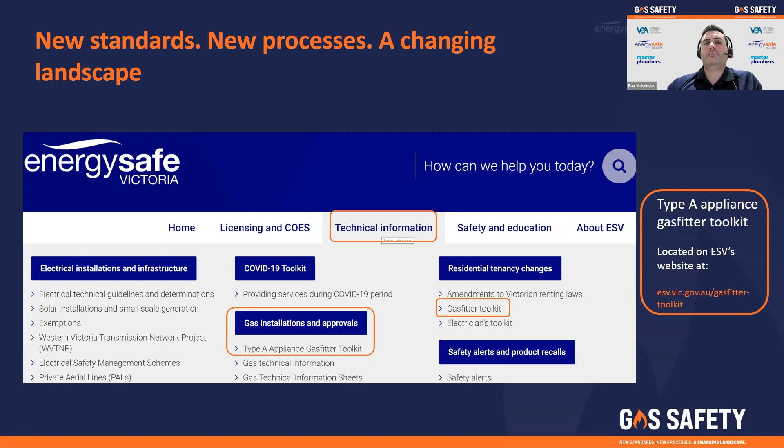Now, when visiting the Gas Fitters Toolkit webpage under the Residential Tenancy Changes, you'll find a frequently asked questions heading, which contains questions ESV and the VBA have received relating to gas safety checklists and gas servicing. This information is constantly revised to incorporate new questions received from industry and can be valuable to you as a servicing gas fitter.

In addition to this, many of you may have already availed yourselves of the gas safety checklist document, which is made available to support gas fitters meet the objectives of the residential tenancy regulations. Gas information sheets specifically relating to gas service work have all been included within to make your browsing experience a little bit easier. Now, we are currently in the process of updating the checklist with the view that you will be able to upload the PDF form onto the VBA portal, which will be discussed further on in this webinar.

I'd also like to take this opportunity to remind gas fitters that not all of the gas safety checks listed within the checklist are safety critical. Now, whilst it is understood that a non-compliant item is identified as part of the gas safety checks, not all of these items listed are deemed reasons to isolate an appliance or cap the appliance off. Now, there's some growing concerns that industry is starting to isolate gas appliances for minor non-compliances that are not immediately unsafe. An example of this is the disconnection of a gas appliance for not having an isolation valve adjacent to the appliance. Now, clearly this is not a safety critical issue, but rather is considered a non-compliance.

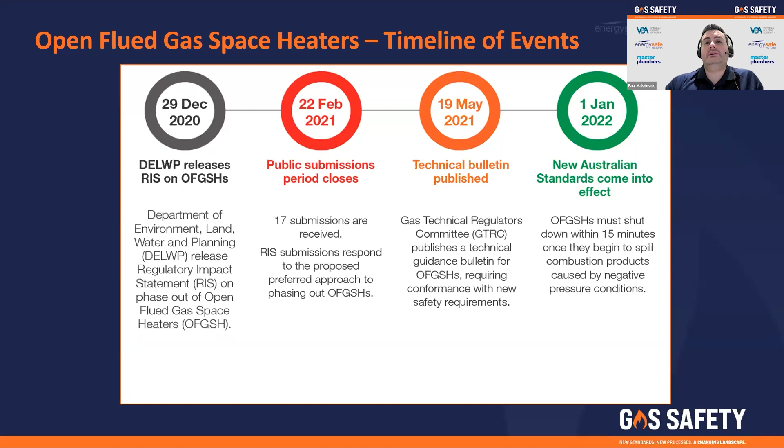ESV is also considering prohibiting the sale of open flue gas space heaters that do not meet the new requirements, as the expectation from industry was that old stock would run out in 2021 and not be sold into the winter of 2022. In addition, the Victorian government is considering prohibiting the installation of open flue gas space heaters that do not meet the new requirements as of the 1st of July this year.

The GTRC Technical Bulletin imposed additional tests to an open flue gas space heater when subjected to a sustained negative room pressure condition. The requirements manufacturers are required to meet are contained within the Technical Guidance Bulletin and can be found on the GTRC website.

There are also amendments to the standard for decorative effect appliances with the introduction of markings for the appliance and its packaging, making it clear that open flue Type 2 decorative effect appliances and Type 1 decorative effect appliances require permanent ventilation.

Recently you may have noticed that ESV have assessed whether to exercise its powers under Section 76 of the Gas Safety Act to prohibit the supply of open flue gas space heaters which do not comply with the current AS/NZS standard, and under Section 69A of the Act, to declare that open flue gas space heaters that do not meet the latest safety requirements specified in the standard are no longer accepted for the purpose of supply and sale in Victoria.

As part of this assessment, we have consulted with industry stakeholders on the proposed regulatory action by means of issuing a consultation notice and draft instruments for public review and response. We are in the process of reviewing the responses received and will keep industry posted of any outcomes moving forward as they are finalised.

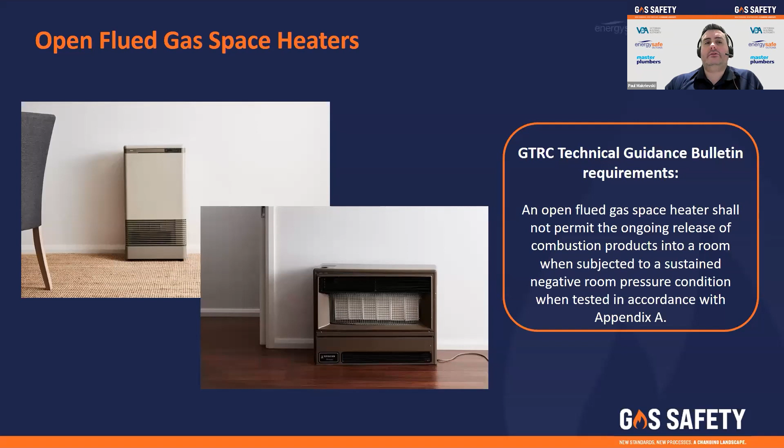Open flue space heaters that currently do meet the standard can be found on the ESV website under the Safety and Education tab, then Gas Safety at Home, Heating Your Home Safely with Gas, and once you're on that page, the tab that is listed as New Safety Standards for Gas Space Heaters.

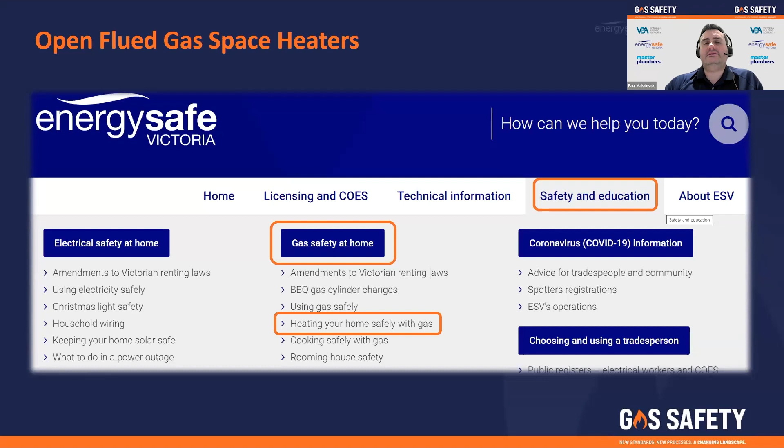A list of the open flue gas space heaters that are currently listed on the ESV website are displayed on this slide, but as we just mentioned, can also be found on our website at any time.

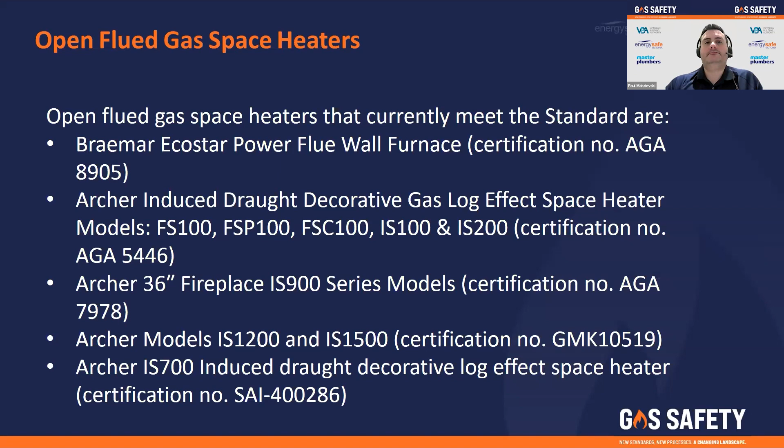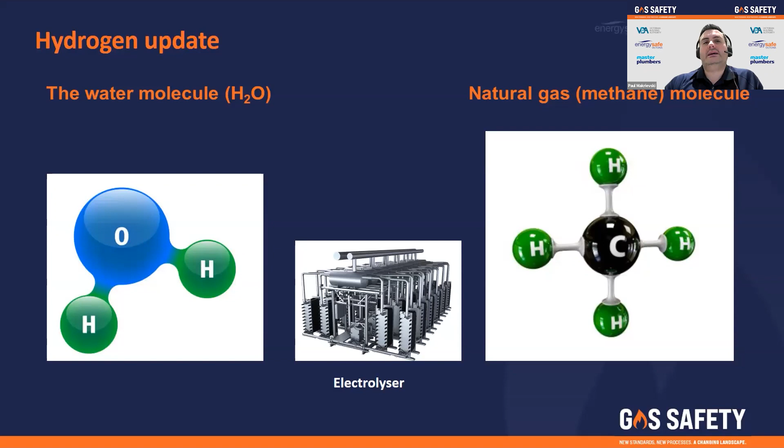Now we'd like to provide an update on hydrogen gas. Bearing in mind we have some significant changes to industry at the moment, so we'll try and keep this as brief as possible. Federal, state and territory governments are committed to net zero carbon emissions by 2050. Hydrogen, as a replacement for natural and LPG gas, is considered part of the solution to achieve net zero emissions, as there are no carbon emissions such as carbon dioxide and carbon monoxide when the gas is burnt.

There are a number of hydrogen-related pilot projects that ESV is involved in. These include the Hydrogen Park Murray Valley proposal, which is to inject 5% and then 10% hydrogen into the Albury-Wodonga network. The HyCel project at Deakin University Warrnambool has a feasibility study to install some boilers operating on 100% hydrogen at the university's campus. In the UK, the first 100% hydrogen demonstration gas home has been built, the HyGrove, which includes a hydrogen cooker, boiler, and space heater.

Emerging technologies such as hydrogen energy storage systems include an electrolyzer to produce hydrogen from water, metal hydride storage to store the hydrogen gas in a solid form, and a fuel cell to convert the stored hydrogen into electrical DC power.

ESV, as a member of the Future Fuels Cooperative Research Centre, is playing an important role in contributing to the research and testing into hydrogen-blended natural gas and 100% hydrogen, and the impact that this will have on transmission and distribution pipelines, consumer piping, appliances, components, and the training and upskilling of gas fitters to transition the workforce in preparation for a hydrogen economy.

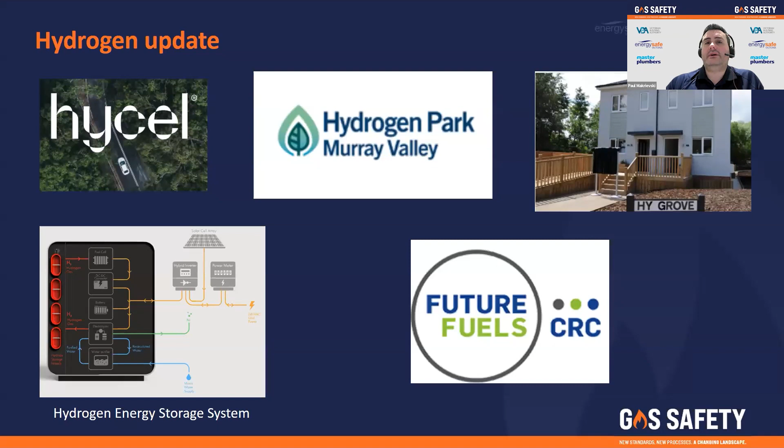The Skills Services Organisation, Artibus Innovation, under the framework of the Australian Industry Skills Council, is facilitating the development of units of competencies for gas fitters training on hydrogen under the Construction and Plumbing Industry Reference Committee working group. This working group has been established to provide both strategic and technical input on the project and unit development.

To date, the working group has identified 6 key skill requirements that address current skills and emerging gaps in this sector. These have been translated into a proposed unit framework underpinned by 2 streams: combustion and fuel cell electrolysis. To ensure current skills needs are met, 11 new hydrogen-based competencies are being put forward aligning with traditional combustion work. To support emerging requirements around fuel cell and electrolysis, 8 new competencies are being proposed to ensure plumbing practitioners are work ready to meet future market needs.

Gas fitters will notice a survey being sent out via email asking for you to share your views on future hydrogen training in a zero carbon economy. The survey should take about 10 minutes to complete and will help design future hydrogen training that meets the needs of plumbers and gas fitters.

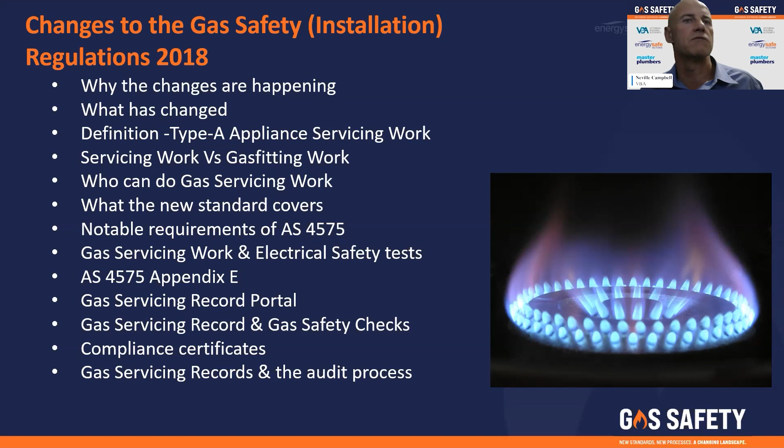The topics we will cover are why the changes are happening, what has changed, the definition of Type A appliance servicing work versus gas fitting work, who can do gas servicing work, what the new standard covers, the notable requirements of AS 4575, gas servicing work and electrical safety tests, AS 4575 Appendix E, the gas servicing record portal, gas servicing records and gas safety checks, compliance certificates, and the audit process.

So why are the changes happening? Since 2010, there have been 3 confirmed fatalities and several incidents of non-fatal carbon monoxide poisoning caused by open flued gas space heaters in Victoria. Until now, there were no mandated Australian standards for the servicing of gas appliances, which meant that the quality of servicing was inconsistent. Following a coronial inquest into the 2017 death of Sonia Sofianopoulos, 8 recommendations were made, including the phase-out of open flued gas space heaters in Victoria.

Further consultation with industry stakeholders reinforced that mandating AS 4575 for gas servicing work would also improve safety outcomes for building occupants.

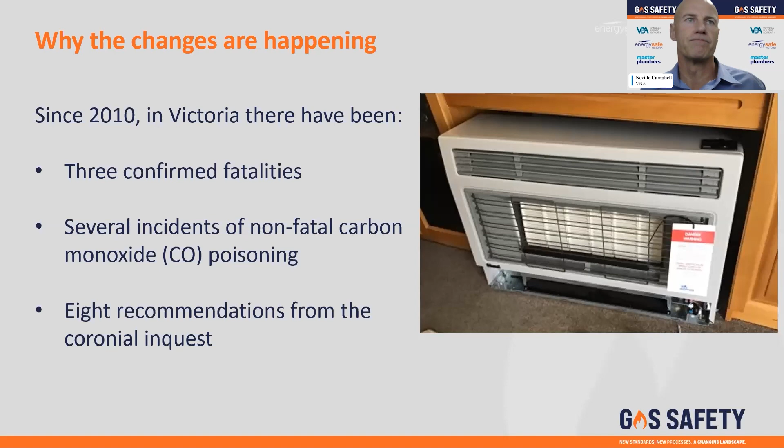So what has changed? To ensure that gas servicing work is carried out to a consistent standard, Australian Standard 4575 has been mandated through changes to the gas safety regulations and is now the minimum standard for carrying out servicing work on a Type A appliance in a standard gas installation.

The changes introduce new terms derived from the plumbing regulations and the Building Act into the gas safety regulations, and define the VBA within the context of the gas safety regulations.

Changes also include a mandatory requirement for gas fitters to create a record of servicing work in a format specified by the VBA, and within 5 days of carrying out the work, the gas fitter must give a copy of the record to the person for whom the work was carried out and lodge a copy of the record with the VBA. Penalties have been introduced for failing to report gas servicing work and for providing false or misleading information in a gas servicing record.

So what is gas servicing work? Type A appliance servicing work, also known as gas servicing work, is a specialised class of gas fitting work and is defined by the Plumbing Regulations 2018, and more recently the Gas Safety Installation Regulations, as the internal cleaning, maintenance and adjusting of a Type A appliance, and includes the adjustment, repair or replacement of a component of a Type A appliance. Note that this would include work such as the replacement of a thermocouple in a hot water unit, a cooktop, or a space heater. More information is available from the plumbing registration and licensing page on the VBA's website.

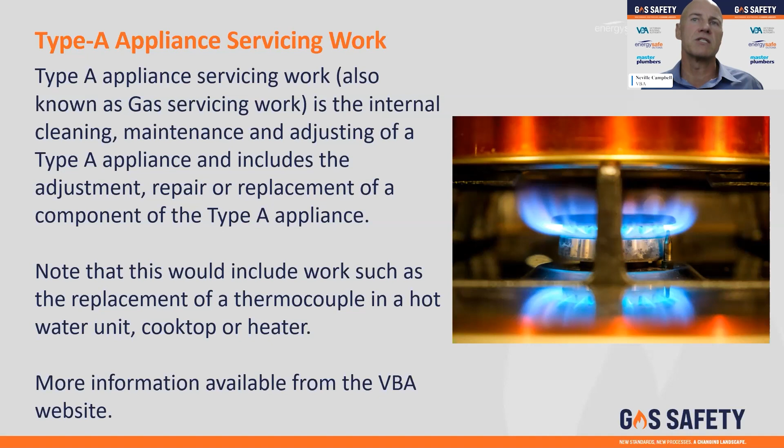Gas servicing work versus gas fitting work - what's the difference? Gas fitting work is also defined by the plumbing regulations, but is not considered a specialised class. And while the definitions are similar, the definition of gas fitting work also specifies that gas fitting work does not include specialised gas fitting work. Therefore, where work could fit within the definition of servicing or repairing an installed appliance, it would be considered gas servicing work. And where the work is incidental to the installation of an appliance, it would be considered gas fitting work.

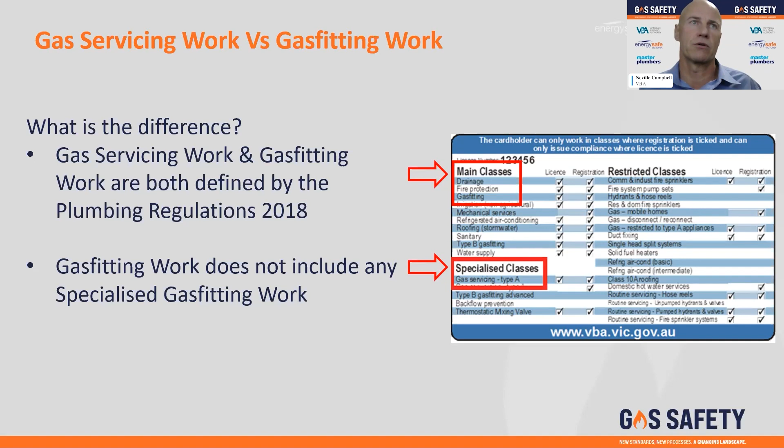Who can do gas servicing work? Gas fitters performing gas servicing work must hold either a licence or registration in the specialised class of Type A appliance servicing work. Plumbers who are registered or provisionally registered must not do any Type A appliance servicing work unless the work is carried out under the supervision of a person who is licensed to carry out work of that class. An apprentice can perform any class of plumbing work under the supervision of a person who is licensed in that type of plumbing work without being licensed or registered by the authority themselves.

It is a requirement of the Building Act that a person is licensed to carry out specialised plumbing work. The penalty for failing to observe this requirement is 500 penalty units.

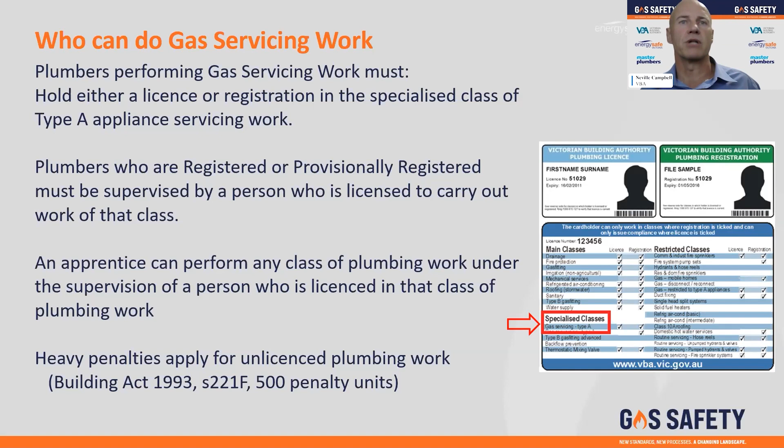AS 4575, what this standard covers. This standard specifies the minimum requirements for Type A appliance servicing, repair and conversion from one gas type to another, testing for safe and correct operation, and related aspects of gas installations. For the purpose of this work, where the term installation is used, it is deemed to include the pipework, appliances, components, flues, air ducts, ventilation, and other ancillary items.

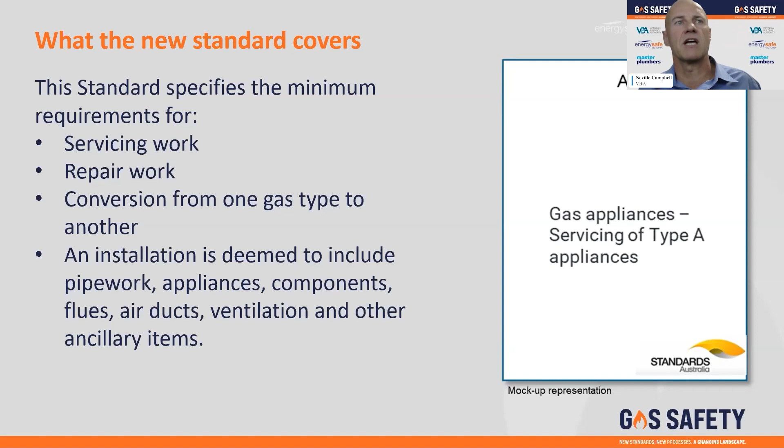Some notable requirements of this standard are preliminary checks for electrical safety, detailed appliance inspection prior to commencing any servicing, repair, testing or conversion work. Tools, equipment and materials must be appropriate for the tasks being performed. This includes things such as CO detection equipment and electrical safety testing equipment. Equipment that requires calibration must be calibrated against a traceable reference source. Documentation, such as a calibration certificate, should be maintained to demonstrate the calibration status of the equipment.

There's a mandatory requirement to test for spillage of combustion products after servicing, repairs or conversion of an appliance. In the case of an internal open flued appliance, the test must be carried out in accordance with Appendix F. The standard also contains both normative and informative appendices, which provide guidance on electrical safety testing during Type A appliance servicing, guidance for appliance servicing, and smoke and spillage testing.

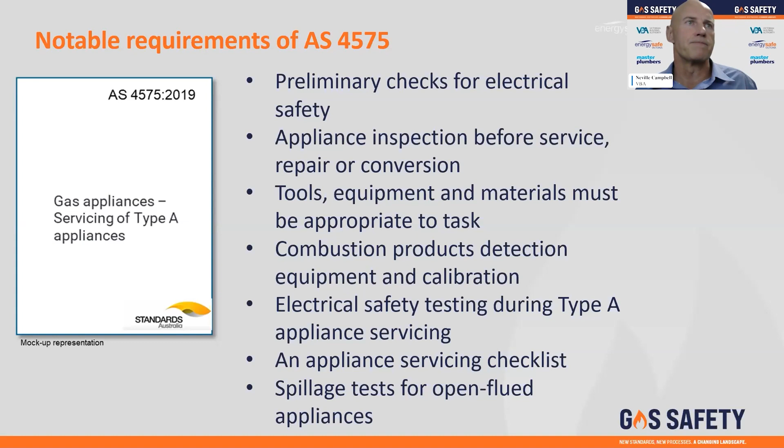Gas servicing work and electrical safety tests. One of the key components of the AS 4575 is the requirement for electrical safety testing, for which the standard provides some guidance. While most of this information is informative only and does not fall within the scope of plumbing work, an earth continuity test is a normative requirement. It is not recommended that gas fitters undertake electrical testing themselves unless they are competent in performing these basic tasks. Gas fitters who are performing gas safety checks should be aware that it is a requirement of the residential tenancies regulations for an appliance to be electrically safe.

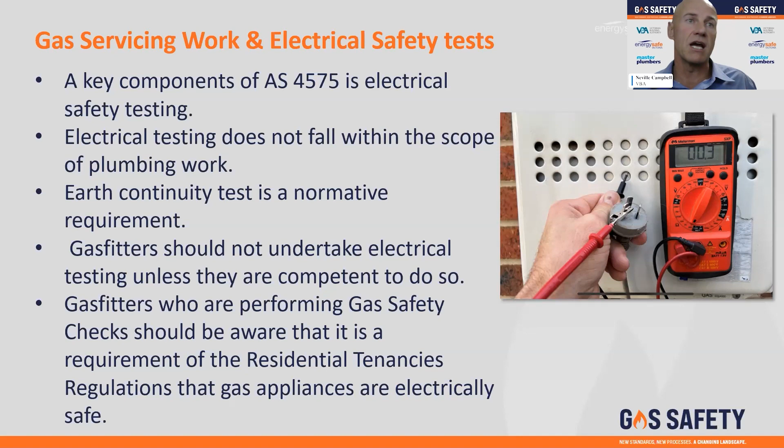Appendix E provides a gas appliance servicing checklist. This appendix is listed in the standard as informative, but has been specifically mandated through changes to the gas safety installation regulations. The changes in the regulations require the gas fitter to submit a copy of the checklist to the VBA as part of the gas servicing record.

One of the requirements in the checklist requires gas fitters to confirm that the appliance is installed in accordance with AS/NZS 5601. Gas fitters performing gas servicing work should be aware that the applicable standard for an installation is the standard that was adopted at the time of the installation, and that the requirements of the current standard do not apply retrospectively.

In Victoria, the AS/NZS 5601-2013 was adopted on the 31st of March 2014. Among other things, this standard introduced significant changes to the way that gas appliance ventilation is calculated in buildings that have been built or altered since that date. So gas fitters will need to confirm which standard applies to the installation when assessing it for compliance with 5601.

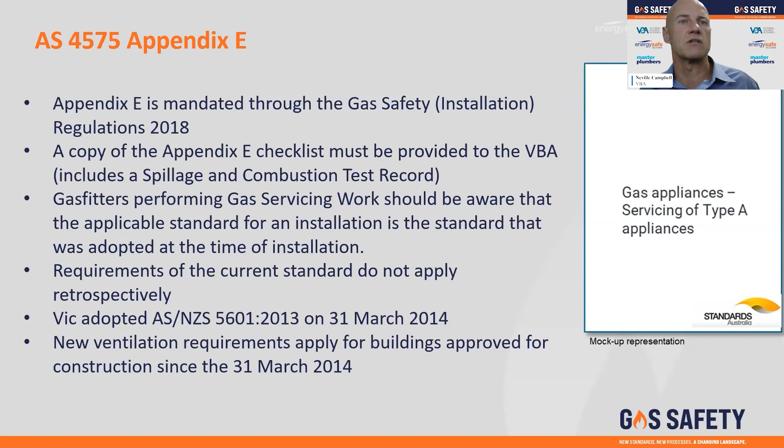Gas Servicing Record Portal. To assist practitioners to meet their new reporting requirements, the VBA have developed a portal that can be accessed from a computer, tablet or smartphone. This means that the mandatory report information can be entered from site in real time. The portal also provides for a copy to be automatically sent to yourself and the person for whom the work was done by entering the respective email addresses.

The portal form consists of 7 fields and some subfields. However, this can vary depending on the number of appliances that you're entering. One mandatory component of the form is the requirement to provide a complete copy of the AS 4575 Appendix E checklist. This can be completed through the portal or emailed to the VBA through the dedicated email address that's available from the portal. The checklist can be in your own format, but must contain all of the Appendix E information at a minimum. Just for clarity, that's the email address there where you can send the Appendix E information.

The Gas Servicing Record Portal can be accessed through the VBA's website and allows text to be copied and pasted directly into the fields. This means that gas fitters can pre-populate some areas of the form ahead of the on-site work, then save and complete the form later. You must enter a licence or registration number at a minimum to be able to save the form. Saving the form will generate a reference number that will appear just under the heading on the page.

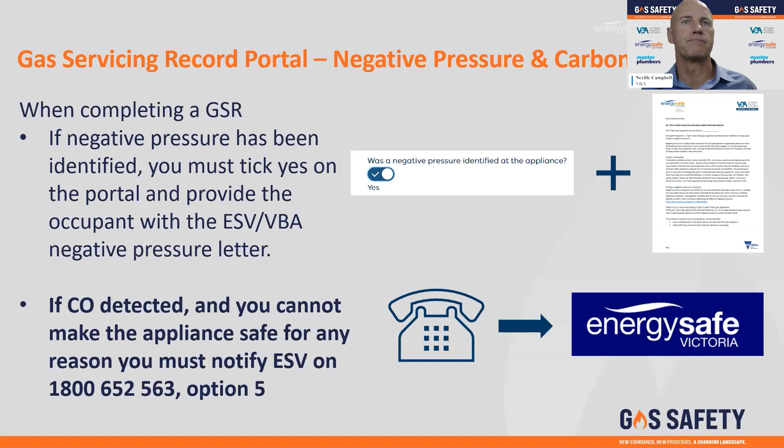The Gas Servicing Record Portal upgrades. The VBA have taken on board the feedback that has been received since the portal's release and continue to work on streamlining the process to reduce the admin burden. Several items have been marked for change and will be implemented in the near future.

So far, changes have included reducing the number of mandatory fields to a minimum so that the form can still be lodged even if specific data is unavailable. Note that this doesn't change the obligation to report the information. It just stops the system from blocking lodgement for incomplete information. Now, as I understand it, there is work still happening on attempting to reduce that further. Some duplicated fields have been removed and some others have been consolidated.

The portal also provides the option for users to lodge Appendix E via the portal or by email, even where CO spillage or negative pressure has been identified. However, providing Appendix E by email does not change the mandatory requirement to complete the other sections of the portal form, or to notify the VBA of negative pressure, or to notify ESV of CO spillage if it cannot be rectified.

Gas servicing records and gas safety checks. What's the difference? The Residential Tenancies Regulations of 2021 came into force on the 29th of March 2021. These regulations are administered by Consumer Affairs Victoria and mandate 2 yearly gas safety checks and servicing of gas appliances for rented premises. The Residential Tenancies Regulations do not form part of the regulatory framework for gas fitting.

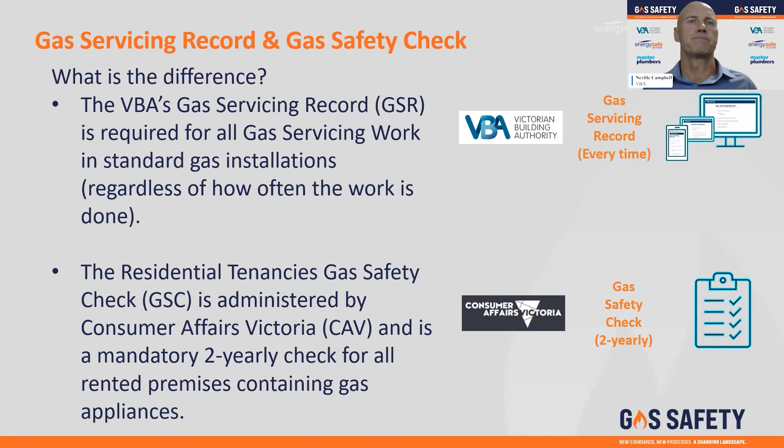Do I need to fill out both? As a gas safety check is prescribed under the Residential Tenancies Regulations, it is not a requirement of the plumbing regulatory framework. However, where a gas fitter is engaged by a rental provider or landlord to carry out a gas safety check in a rental property, the gas servicing record must be completed, but will only satisfy the gas servicing component of the gas safety check and will not satisfy all of the gas safety check requirements. Additional requirements of the gas safety check will also need to be completed.

The gas servicing record must be lodged with the VBA via the portal, and a copy of this record included in the documentation for the gas safety check. Where a gas fitter is carrying out servicing work in an owner-occupied premises, they are not required to complete a gas safety check. However, they are required to lodge a gas servicing record with the VBA and provide a copy to the customer. The gas servicing record must also be lodged for repairs to Type A appliances.

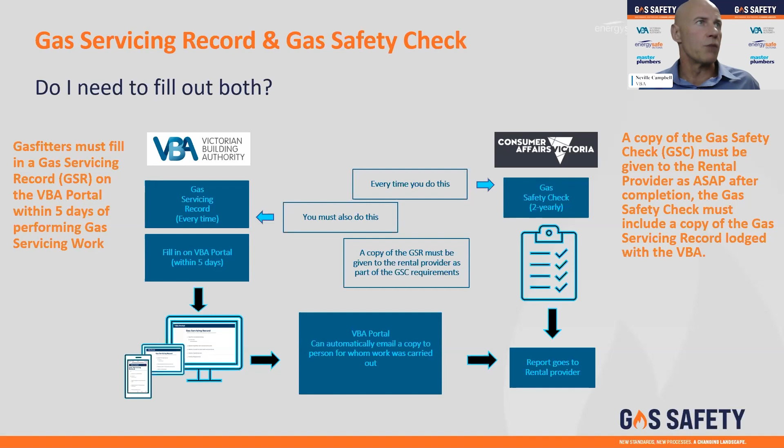When is a compliance certificate required for gas servicing work? When conducting gas servicing work, compliance certificates are required for the following. The total cost is $750 or more, including GST. Compliance certificates are required for the installation, relocation, or replacement of a gas-using appliance. The modification of consumer gas piping, including the replacement of a flexible connection or isolating valve. The disconnection and removal of an appliance from its fixed position, even temporarily.

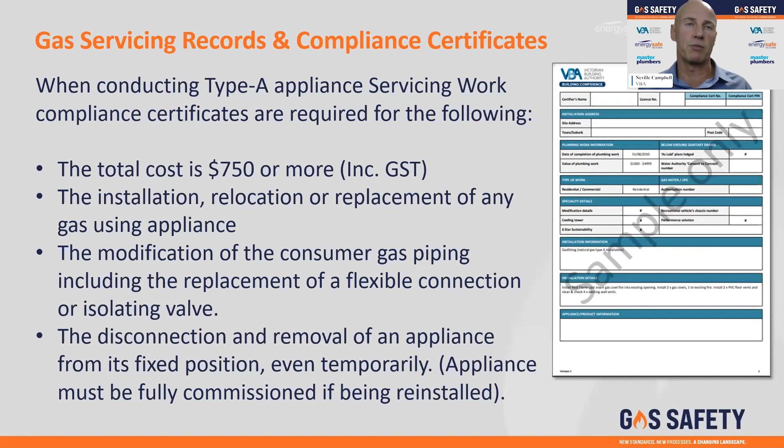Just a reminder there that if an appliance is pulled out from its fixed position and put back in, it's effectively being reinstalled and must be fully commissioned. The temporary disconnection of an appliance that is not removed from its fixed position does not require a compliance certificate. An example of this might be working on a freestanding cooker where there's no isolation valve connecting the cooker.

So you may require parts for the cooker which you need to source, but you need to restore gas to the rest of the house. So you might just cap it at that point, restore gas to the rest of the house and leave the appliance in its fixed position but isolated. Penalties apply for failing to issue compliance certificates where required by the Building Act. The penalty is 60 penalty units.

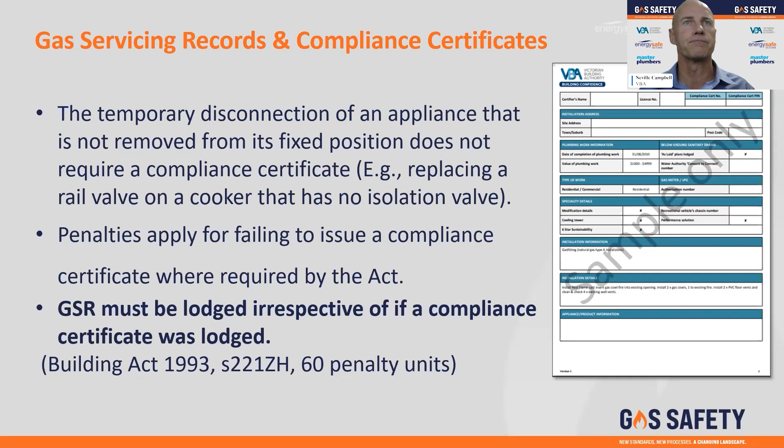Gas servicing records in the audit process. A common question we get asked is, will I get audited on a gas servicing record? Gas servicing records will form a normal part of the risk-based audit and inspection regime.